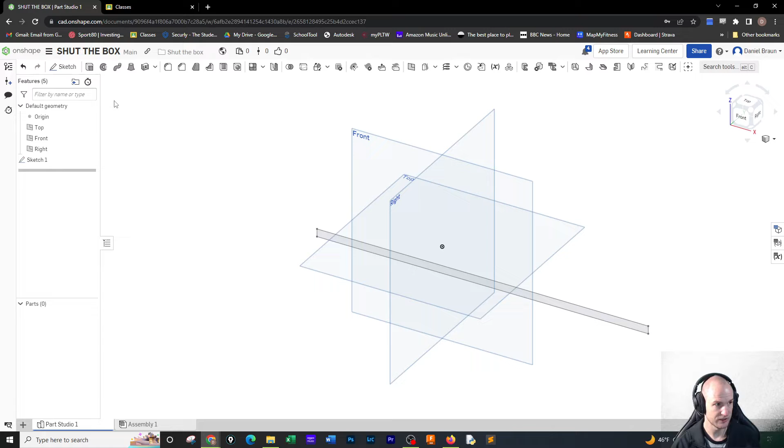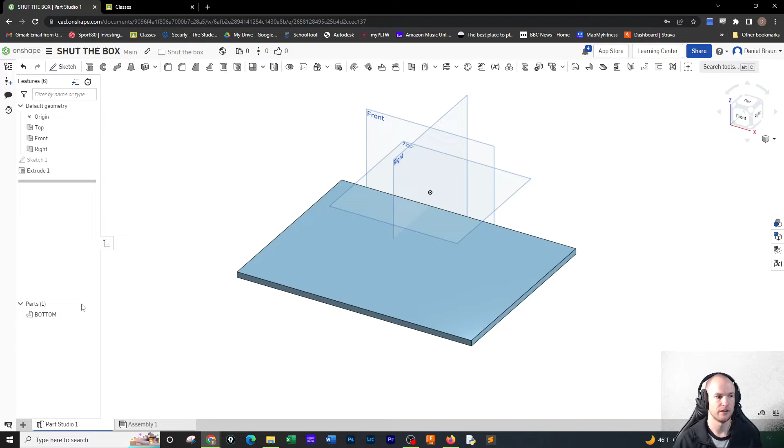I'm going to finish this sketch up. I'm going to extrude it 8.5 inches. Okay? So 8.5 inches. And I'm going to name it, because naming parts is important. I'm going to name that the bottom. All right. And then I'm going to turn it off, because I don't want to deal with it.

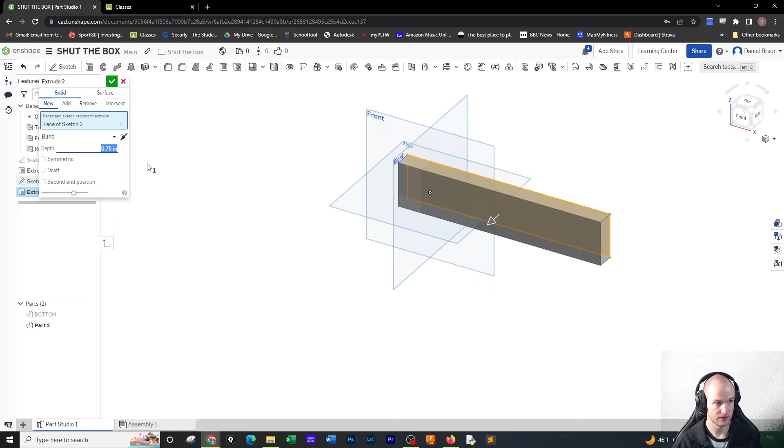I'm going to go to sketch. I'm going to draw a part. It's going to be called the front. It's going to be 9.5 by 2. So 9.5 by 2. I'm going to hit finish sketch. I'm going to extrude this, and we're going to extrude this 0.75. So 0.75, 3/4 of an inch. So that is the front.

I am going to rename this. I'm going to call it front / back, because it is the front and the back. I'm going to turn it off. I'm going to make a sketch. I'm going to click on the front. And I'm trying to draw these things in the way they're going to be oriented when I bring them into the part studio, so I don't have to rotate them.

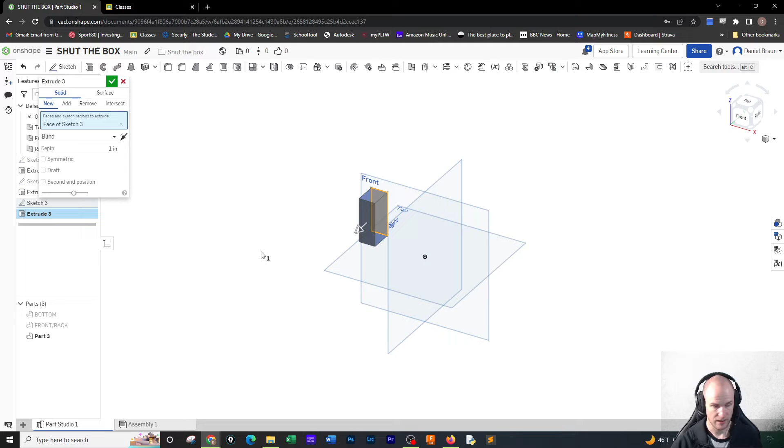That's why this one, when I draw it, it's going to be 2 tall by 0.75 wide. So those are the dimensions, in case you can't see it. 2 tall by 0.75 wide. Finish sketch, and I'm going to extrude this 8.5 inches. So 8.5 inches. So there we go. Gonna check that off. I gotta do one more thing on this.

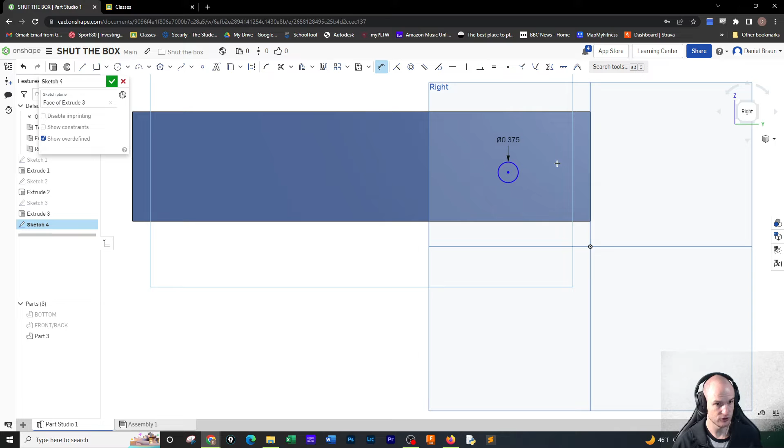I gotta make a sketch right here on the side. I wanna turn to the right. I wanna draw a circle. That circle should be 3/8. And it should be, let's see. This is the first one I actually have to kind of remember. When we are drawing this, I'm gonna give you all a packet that's got all the dimensions in it, which is what I'm referring to right now.

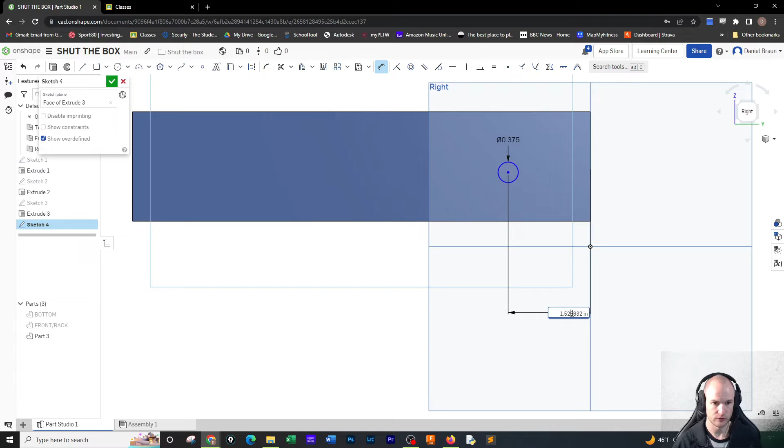But it is going to be 2 inches. We're going to go 2 inches from the back edge, and then we're going to go from here to the bottom. That's going to be 1/2 inch. So we got a 2 inch, a 1/2 inch, and the circle is 3/8 or 0.375. Okay. And we're just going to extrude that and remove it all the way through. So there we go. If we rename this, it's going to be the side, and we're going to have 2 of those.

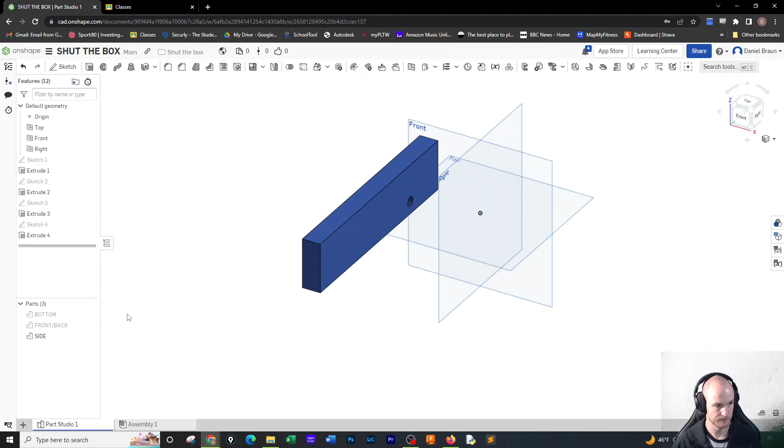We are going to make a sketch on this side thing. We're going to make something called a dowel. So I'm going to turn to the side so it's a little easier to see. The dowel is just going to be a 3/8 inch rod. So I'm just going to draw a 3/8 circle. I'm going to hit finish sketch on that 3/8 circle. I'm going to go to extrude. I'm going to click on it.

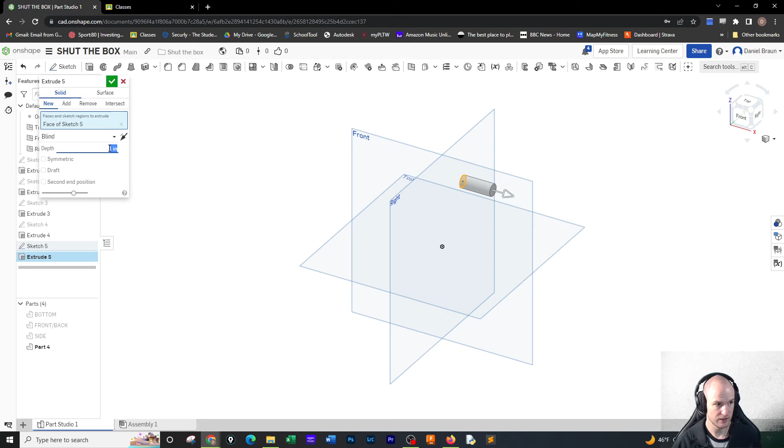And I want this 3/8 circle to be 11 inches. So make that 3/8 circle 11 inches. And when you've done so, finish the sketch. And I'm going to call that dowel. Okay, I'm going to make that invisible. I'm going to sketch on the front here.

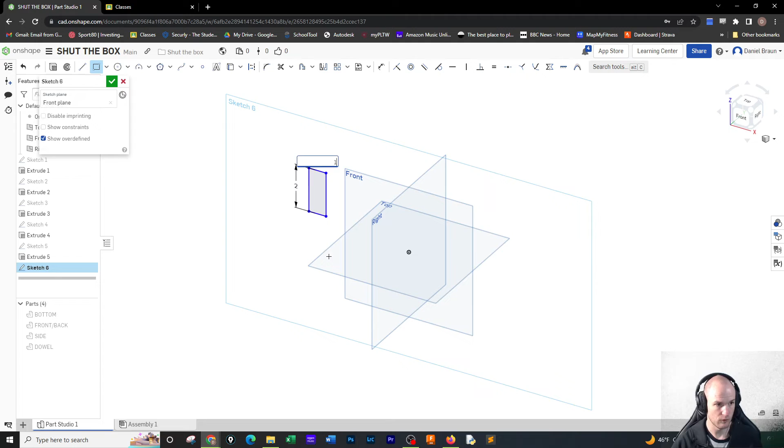I'm going to draw a block that is 2 inches by 1 inch. So 2 by 1. I'm going to finish the sketch. We're going to extrude this block 0.75, not 1 inch, 0.75. So 0.75 is the extrusion. I'm going to hit check. And then I've got to make a sketch on the side face, which I will turn to. And right in the center, we're going to draw a 3/8 hole.

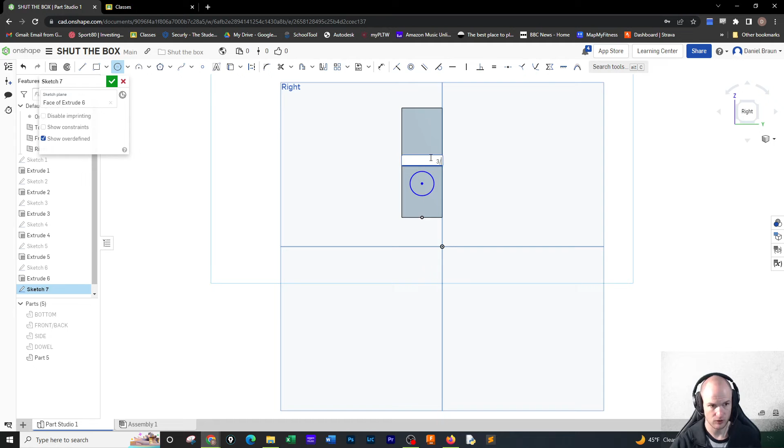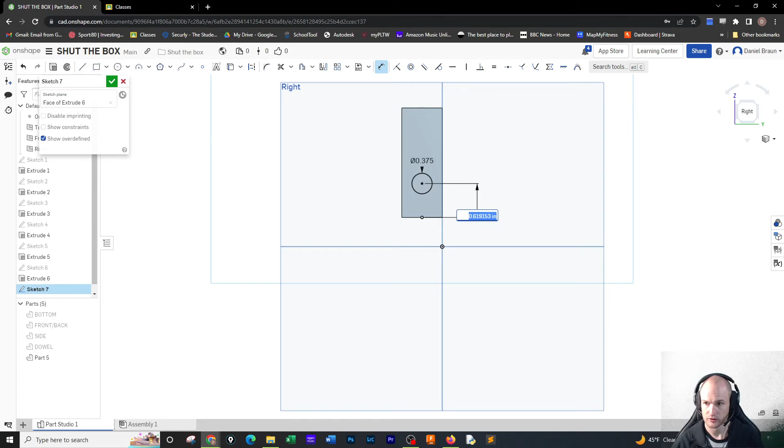And as I said, if I dimension it, sorry, checking my sheet, 1/2 inch from the bottom. And as we already said, it should be right in the center, which is also, when you look at it, 3/8, 0.375. I can move that over to the side so you can see. So there's the 3 dimensions required for this. Give you a second to drink it in.

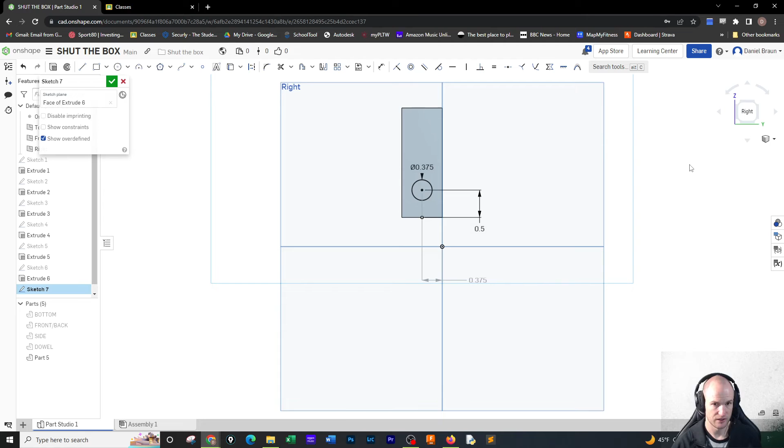And hit finish sketch. And I'm going to extrude. Oh, didn't want that. Click it again. Just wanted this. And we're going to remove this 1 inch all the way through. So you can see, it's all the way through. I'm going to call this a flipper because that's what it is.

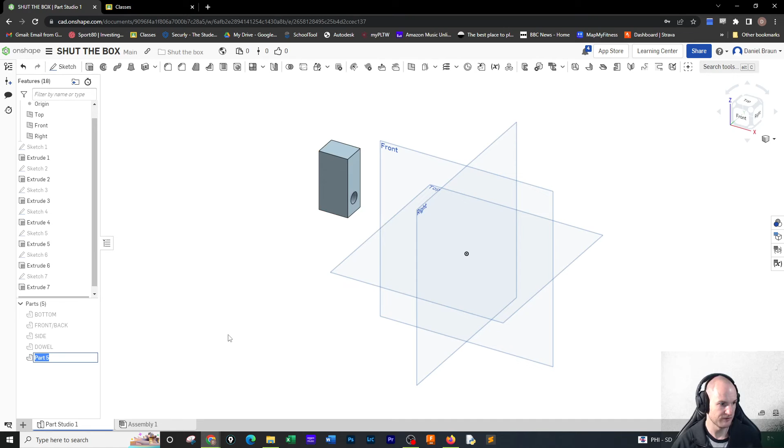Now, if you want to get fancy, you can make 9 different flippers. And you can number them each, like 1, 2, 3, etc. I'm not going to get fancy like that. I'm just going to do a regular flipper and use it 9 times, and I won't worry about putting numbers on them. If you want to get fancy, though, you are free to do that.

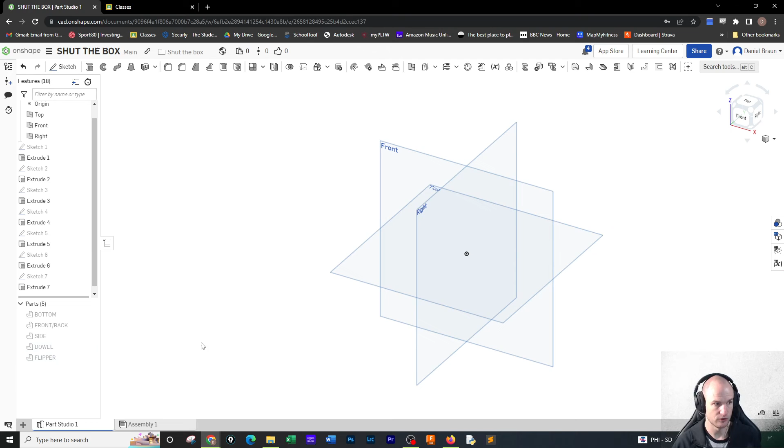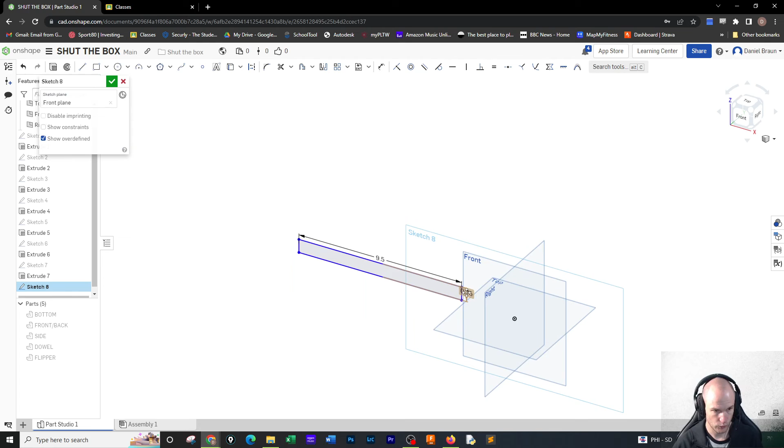And then I'm going to do a sketch, and I have to make the piece that the flippers rest on. I'm going to call it the separator piece. This piece should be 9.5 by 0.75. So 9.5 by 0.75. So you can see that 0.75. Okay. And then I'm going to go to extrude, and I'm going to extrude it 1/2 of an inch, so 0.5. So I'm going to extrude it 0.5, 1/2 of an inch.

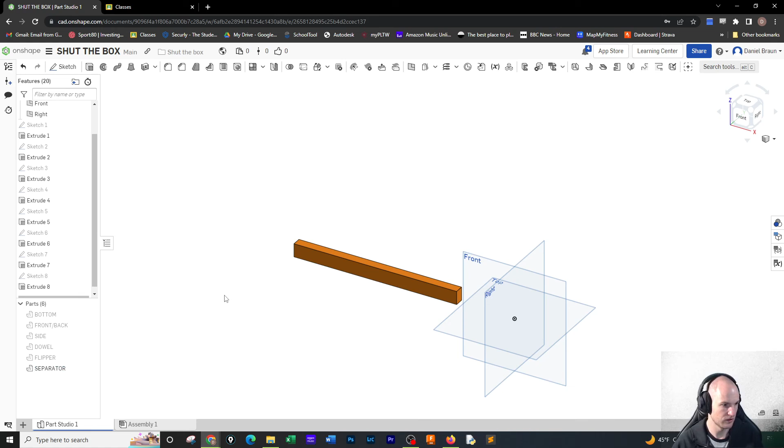I'm going to hit check, and I'm going to name it the separator. So rename separator. And the last thing I'm going to do is I'm going to turn them all on. Oops. And I'm just going to click one and go right click and edit appearance. And I just want them to all be the same appearance. So once I check the one, I can go down and click all of them and notice how they all change to that appearance. And that's good.

You can turn them on or off if you want to here, but you are actually good to go to assembly here. You have the required number of pieces. So that is all you need.